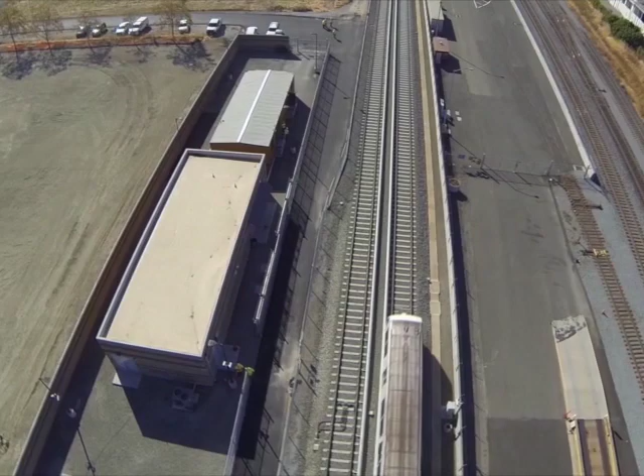The first phase of the program, the Berryessa Extension Project, continues the BART alignment from Alameda County to the Berryessa area of North San Jose. The project is in the testing phase and service is expected to begin later this year.

The second phase of the project will continue from the Berryessa Extension and descend into a tunnel below downtown San Jose. West of downtown, with the 3 underground stations, the alignment will continue north to the Santa Clara Terminal Station in the city of Santa Clara.

A flyover of the alignment provides geographical details and perspective to assist envisioning the project and its structures in relation to existing land use. This aerial flyover begins in North San Jose and zooms into the intersection of US 101 and East Taylor Street. This is the newly constructed Berryessa North San Jose station and tail tracks that cross over Mabury Road. It's where the extension into downtown San Jose will begin.

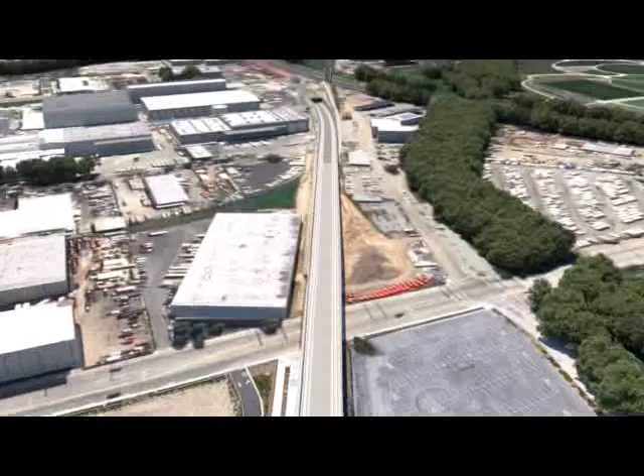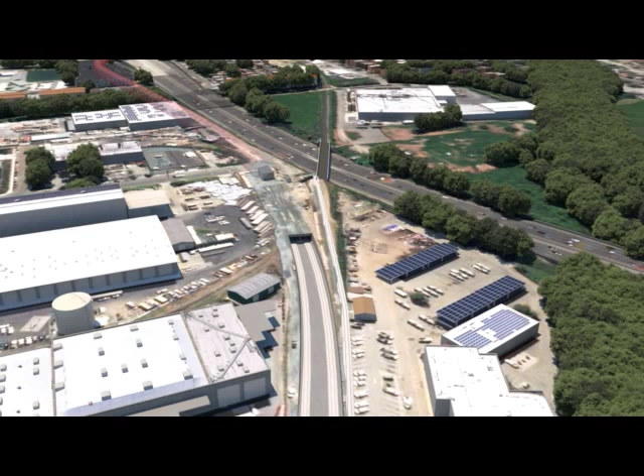The elevated tracks will descend to the location of the East Tunnel Portal that will be constructed as part of BART Silicon Valley Phase 2. From the East Tunnel Portal, a cut-and-cover structure will extend to the head wall of the bored tunnel at Las Plumas Avenue. Approximately 2 acres of construction staging area in this vicinity will be available to the contractor during construction of the project. An emergency egress and maintenance structure will be located above the cut-and-cover tunnel.

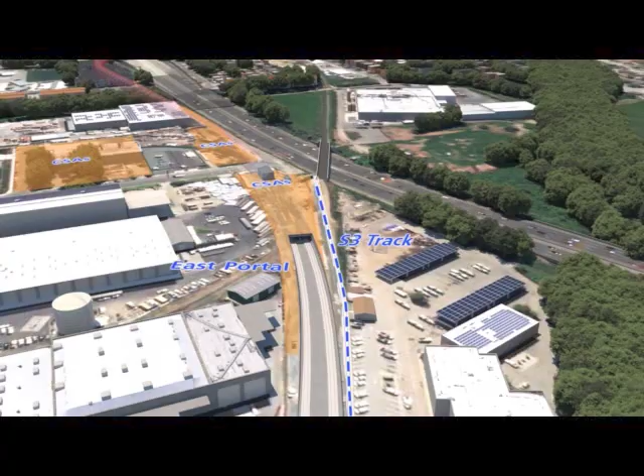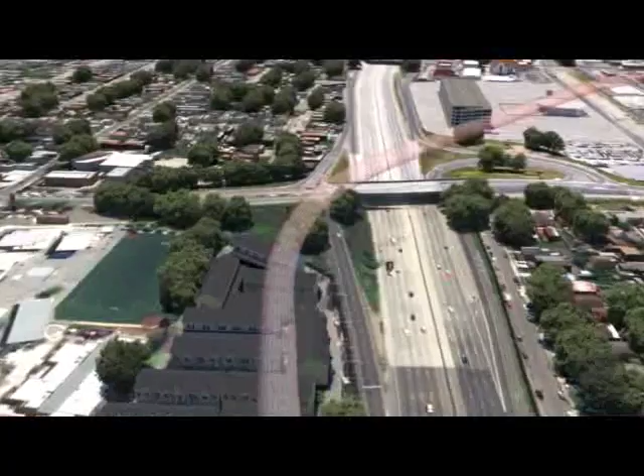From the East Portal, the tunnel will continue along North Marburg Way, parallel to U.S. Highway 101. The alignment will cross below Lower Silver Creek and a residential complex. From here, the tunnel turns under McKee Road and passes beneath US 101 as it approaches the future 28th Street Little Portugal station. The station entrance building, also called a head house, will be located along 28th Street between Five Wounds Lane and East St. James Street. A total of 14 acres of construction staging area will be available to the contractor at this site.

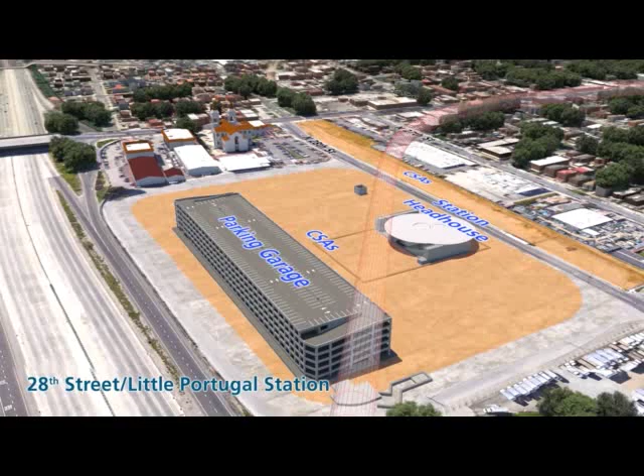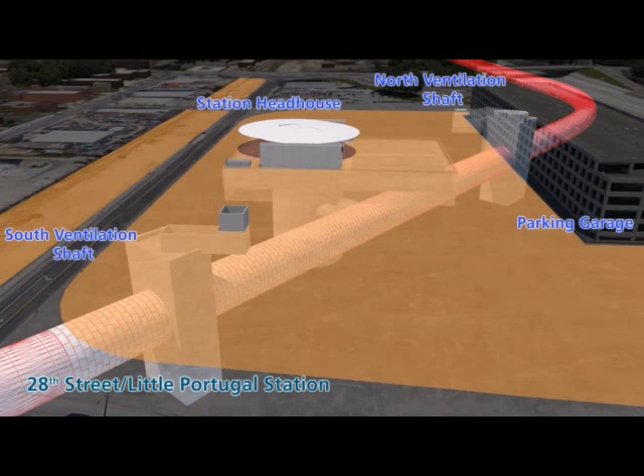Ventilation facilities will be located on the north and south extents of the station. Passengers will enter the station from the east and west side of the head house and will proceed from the street level to the concourse level within the tunnel using high-speed elevators and stairs. The head house will connect to the bored tunnel with small mined tunnels, which passengers will use to access the station concourse, which extends the entire length of the platform. Once arriving at the concourse level, passengers will descend to the platform using either stairs or elevators.

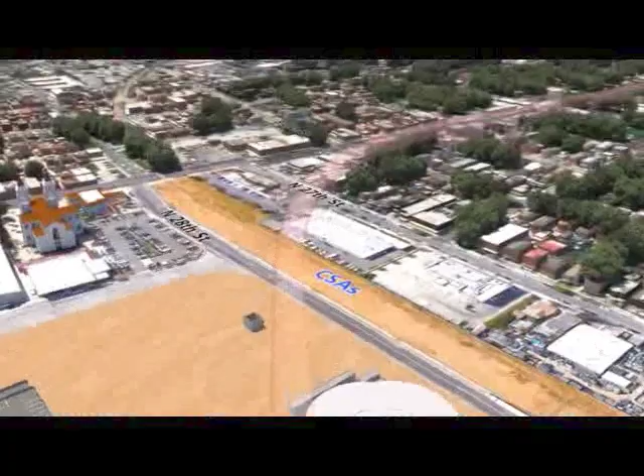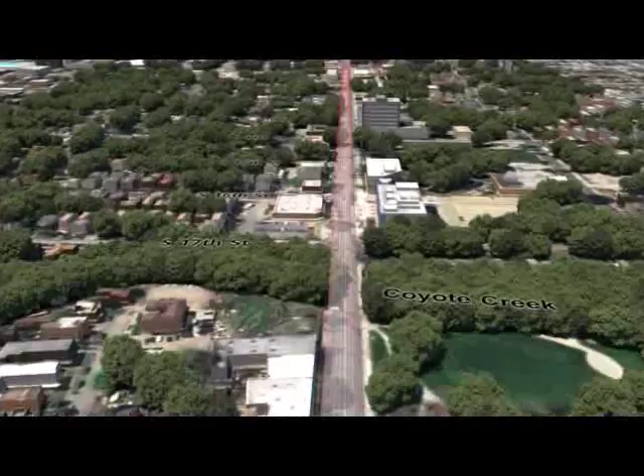A parking garage with 1,200 spaces to accommodate future BART riders will be constructed at the northeast corner of the station area, parallel to US 101. The tunnel will continue from 28th Street Little Portugal Station, crossing beneath 27th Street, and then align with East Santa Clara Street. Passing 26th Street, the tunnel will enter into the North Silver Creek Fault Zone, which extends to approximately 20th Street. After passing under 18th Street, the tunnel proceeds below Coyote Creek. The tunnel will lie completely within the East Santa Clara Street right-of-way as it continues toward downtown San Jose.

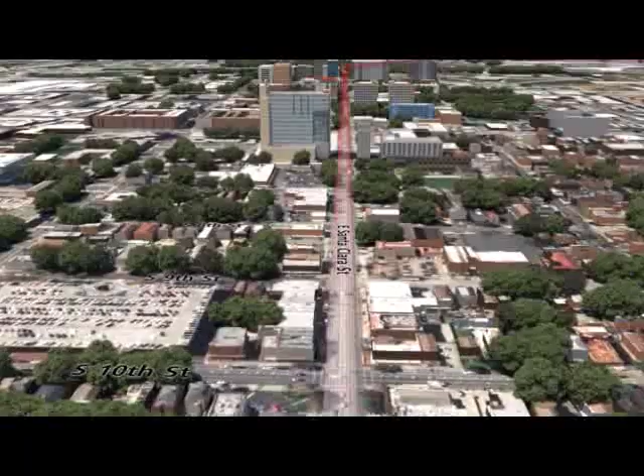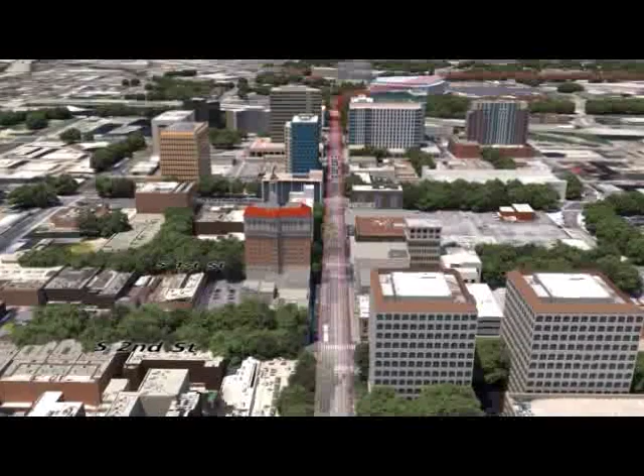At 5th Street, the tunnel will pass by San Jose City Hall and proceed to the heart of downtown San Jose. The downtown station will be on the north side of Santa Clara Street, between First and Market Streets. The entrance building, or head house, will be located at the current site of the Chase Bank and VTA Customer Service Center. A second facility will also be on the north side of the street between First and Second Streets, serving both as an emergency egress and ventilation facility.

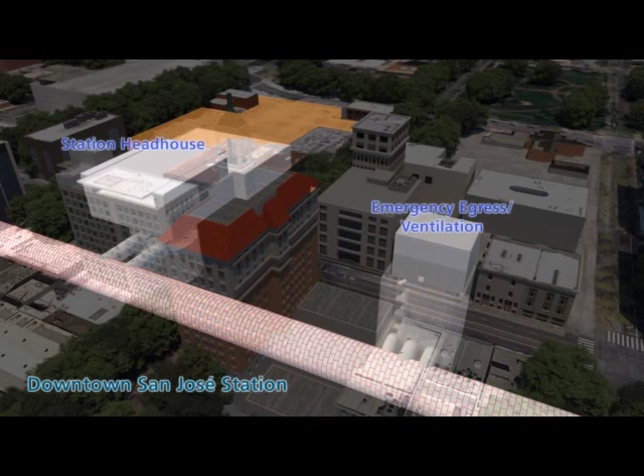The main head house and emergency egress or ventilation facility will be connected to the bored tunnel by mined connecting tunnels, similar to the 28th Street Little Portugal station. The main entrance head house will provide passengers with stairs and a bank of high-speed elevators to connect the street level and the concourse level below. The existing large parking lot behind the main station entrance has already been acquired by VTA and will allow approximately 3.5 acres of contractor staging area during construction.

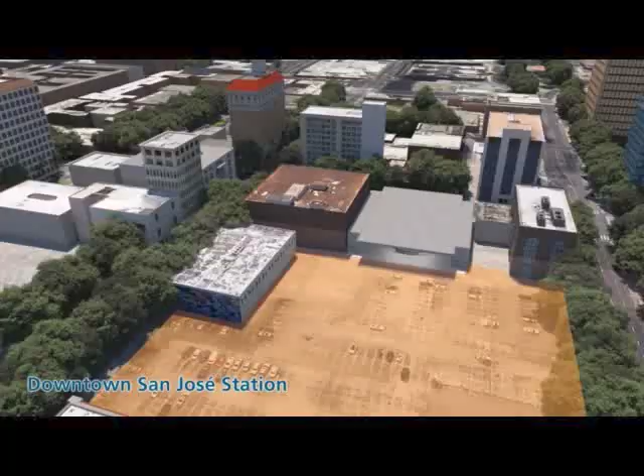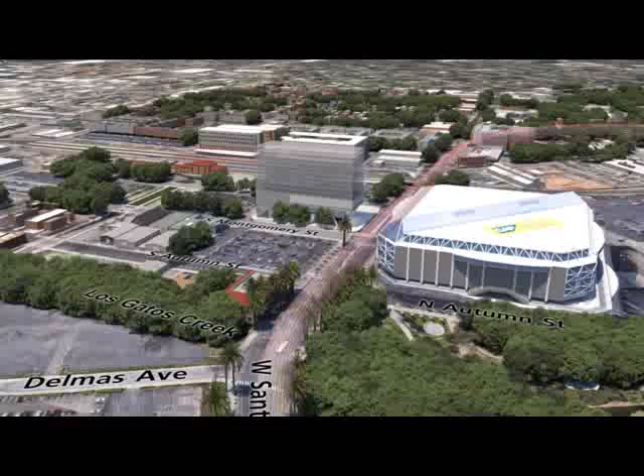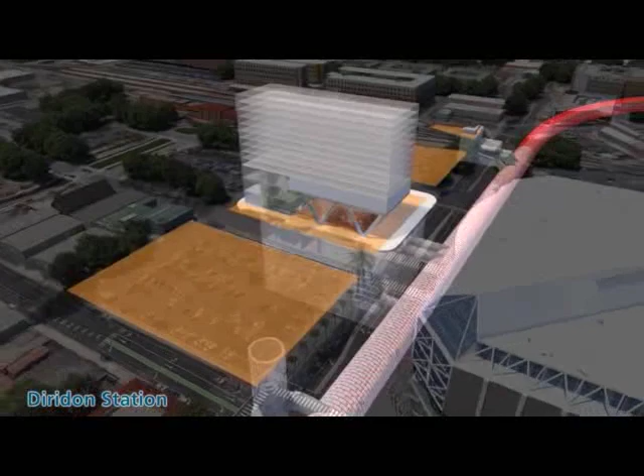As the alignment continues west, the tunnel will then pass below Highway 87, the Guadalupe River, and Los Gatos Creek as it approaches the Diridon area. The Diridon station entrance will be located on the corner of Montgomery Street and West Santa Clara Street, across from the SAP Center. This station will include escalators and high-speed elevators for passengers to travel from street level to concourse level. Ventilation facilities will be located at the east and west end of the station, with small facilities at the surface. Connections with the bored tunnel will be made by small mined tunnels.

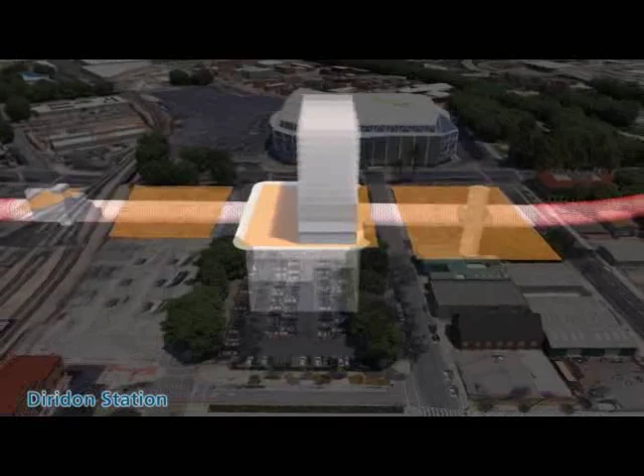Google has recently submitted development plans for the area around the future BART station and other existing and future transit services. VTA is coordinating with Google as well as working with the City of San Jose, Caltrain, and High Speed Rail on the Diridon Integrated Station Concept Plan, looking at the various multimodal connections in this area.

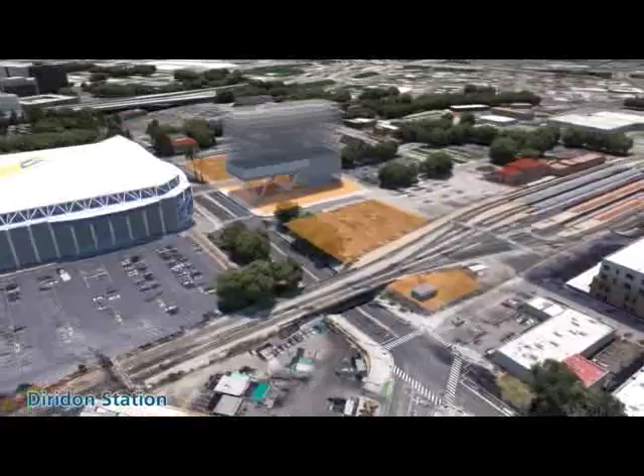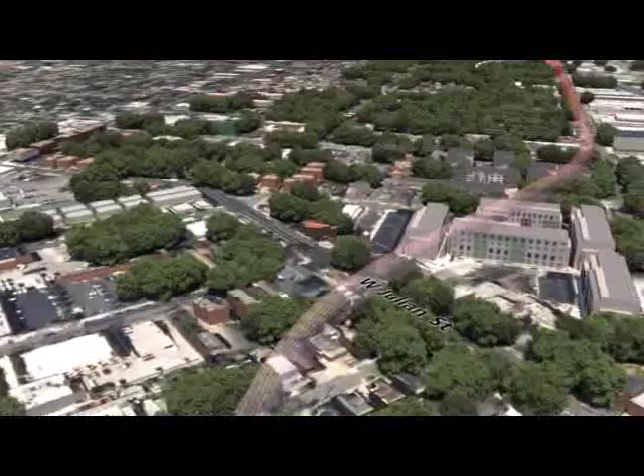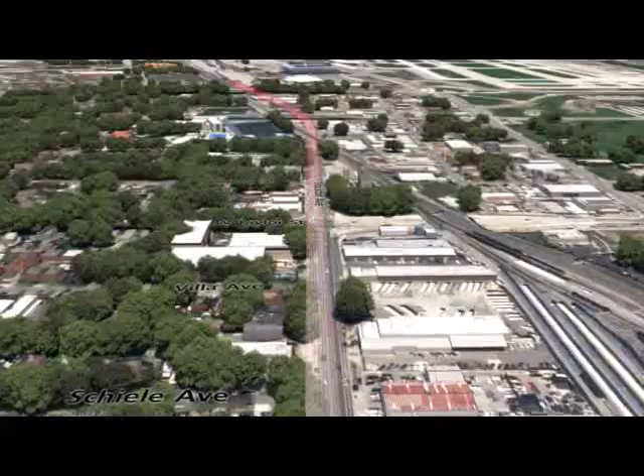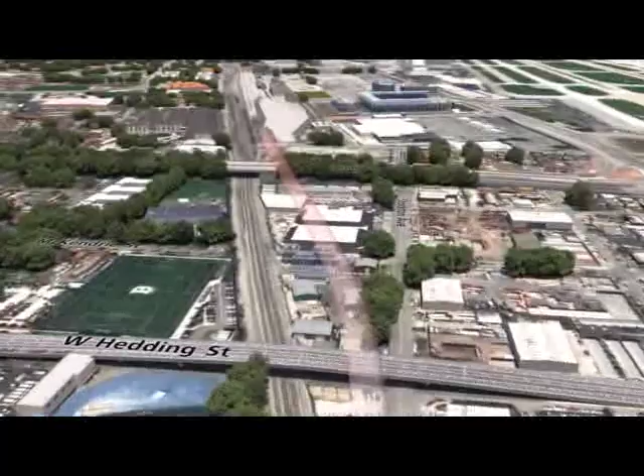After the Diridon station, the tunnel will continue west beneath the Caltrain tracks and then briefly cross under the Alameda before turning north, passing below Julian Street, Lenzen Avenue, and merging onto Stockton Avenue at Pershing Avenue. While staying within the Stockton Avenue public right-of-way, the alignment will pass by residences to the west and light industrial buildings to the east. North of Emory Street, the tunnel will pass below Caltrain's tracks and light industrial buildings, then immediately below the West Hedding Street and Interstate 880 elevated overpasses. North of Newhall Street, the tunnel will enter and run under VTA property until it daylights at the West Portal.

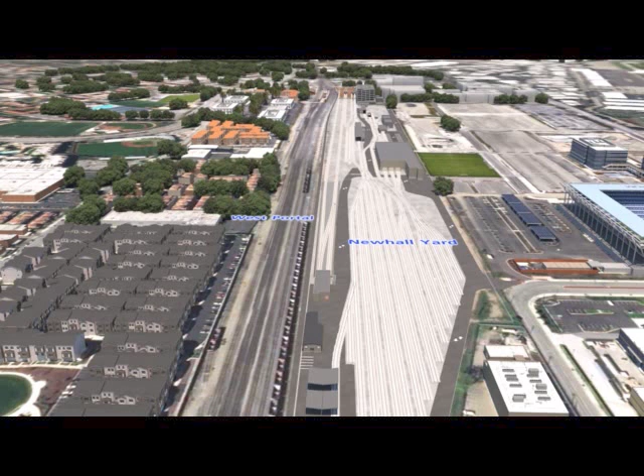This site will initially be used as a construction staging area and then will house the Newhall Maintenance Yard. From this approximately 40-acre staging area, the contractor will launch the TBM and use the lot for muck removal, lining segment storage, and other logistics operations. At the north end of the future yard, the Terminal Santa Clara station will be directly across the existing Caltrain station platform and connected through an underground passage.

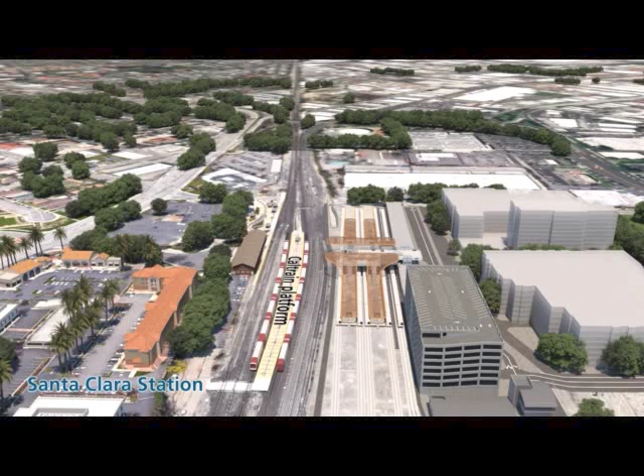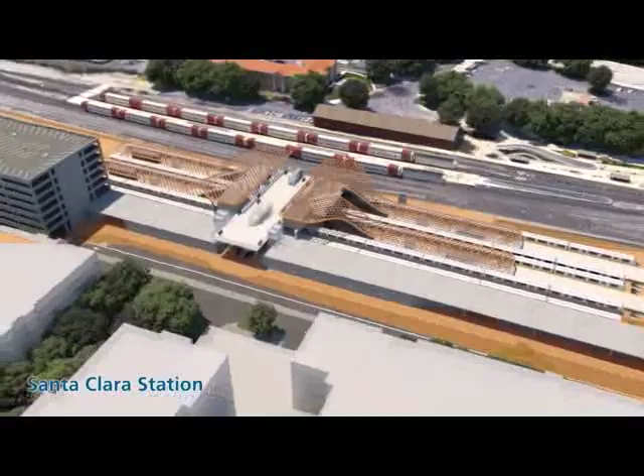A parking garage with 500 spaces for BART riders will be just south of the station entrance. The Santa Clara station will have 2 platforms and will function much like the existing BART station at San Francisco International Airport. A large mixed-use development is planned for the area to the east of the Santa Clara station. Once completed, the VTA BART Silicon Valley program will provide Santa Clara County with reliable, frequent, and high-capacity transit service for the 21st century.